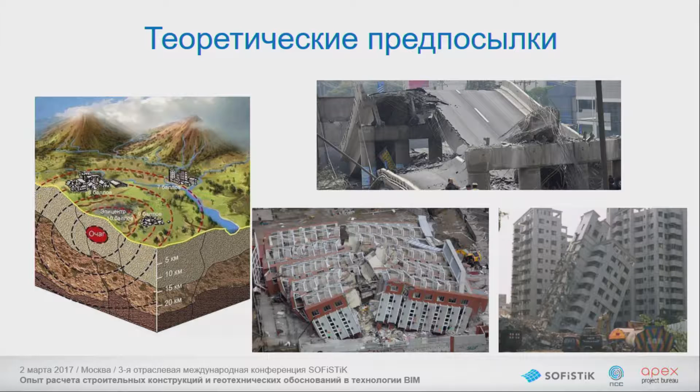It's a pity we have a lot of human losses and material losses, which means we have to take into account seismic activities. In some regions of Russia and neighboring countries, such calculations are mandatory. I lived in Sochi, and seismic there is up to zone 9. Before showing how to do it in SOFiSTiK, let us recall what an earthquake is, how we take it into account, and what kind of seismic analysis is available for different buildings. Special attention must be paid to compliance with local Russian norms and how they are implemented in SOFiSTiK.

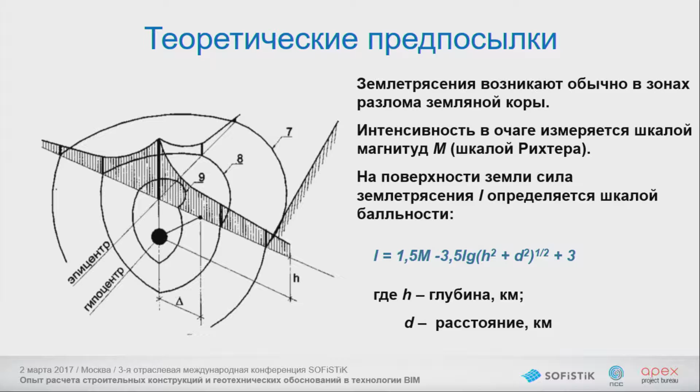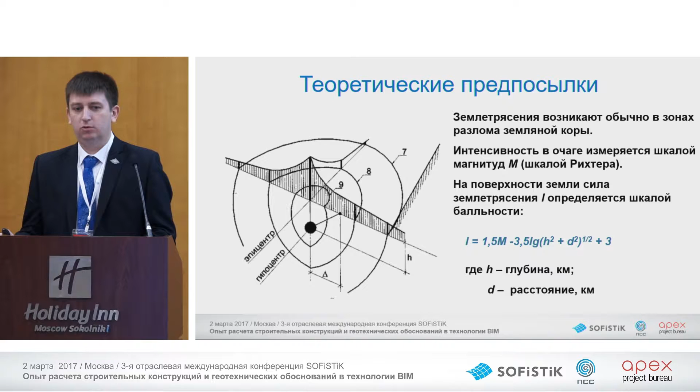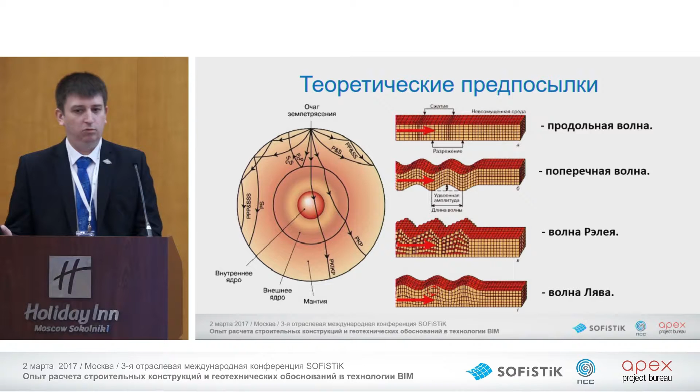As you can see, there are deep underground waves, longitudinal and transverse, which provide oscillations. When deep waves reflect from the Earth's surface, we have reflected waves as well.

In Russia, we use the 12-point seismic scale. We also take into account the accelerations on the ground, and the limit is zone 9. Above 9, no structure will sustain it; any structure will collapse.

Of course, there are some requirements for seismic calculations. We have to use two situations: the seismic loads for the projected earthquake and the maximum possible earthquake. Such calculations should be carried out with the help of instrumental or synthetic oscillograms.

For buildings with a simple design, we can use calculations based on a cantilever dynamic model. For buildings with a complex design, we have to take into account special calculation dynamic models of the buildings.

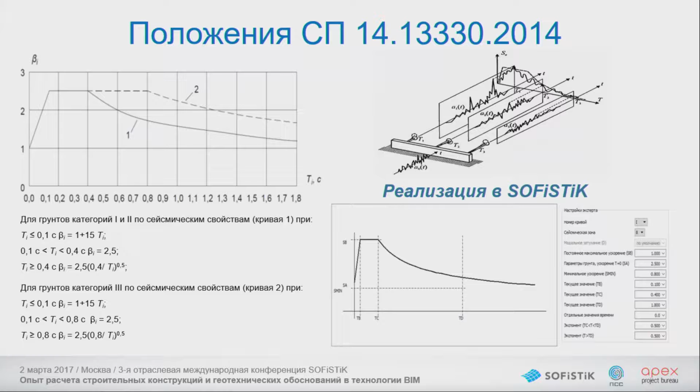This is normalized and compared with the regulators' norms. For example, the response spectrum shown in our Russian documents is on the left, and below it on your right is the same chart in SOFiSTiK.

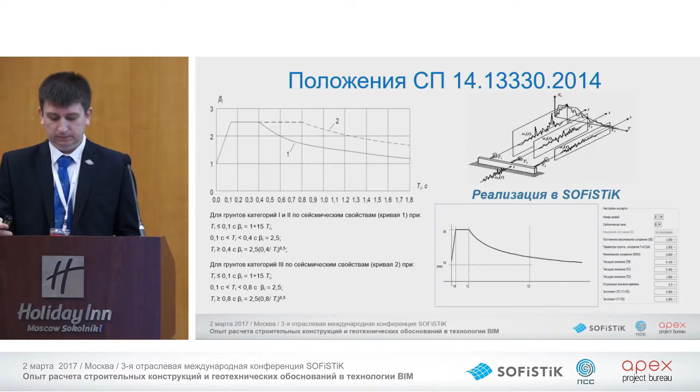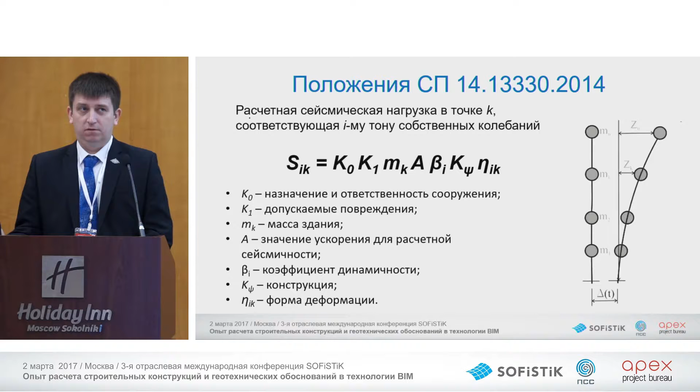The seismic load in the Russian norms is defined according to a formula with indices for the purpose of the building, acceptable damage, mass, acceleration, and other parameters. SOFiSTiK uses almost the same formula. I'll show it to you.

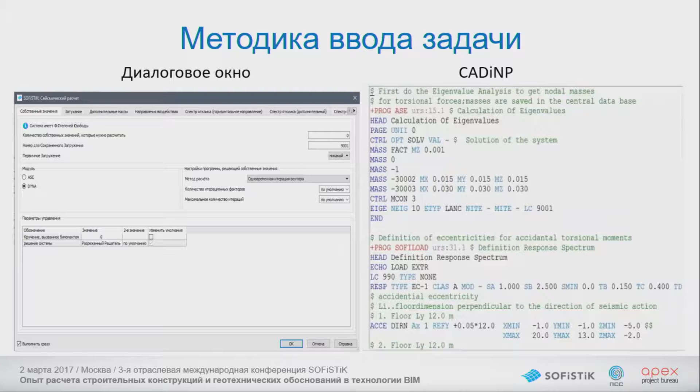To begin with, I would like to show you the implementation of the linear spectral method in SOFiSTiK. We have a separate dialogue for that, called seismic calculation in Russian. As with everything in SOFiSTiK, we can do it in CADINP language or through the dialog interface. You are free to choose either. In CADINP, you have more options to manipulate initial data and get appropriate results. The dialog window is simpler and more user-friendly, but more limited, as usual.

The dialog task is added from the SSD window. We open the list of tasks, choose seismic or earthquake if it's the English language interface, and see what it contains. It consists of several tabs describing certain steps.

Data entry to calculate frequencies of oscillations, damping, additional masses, vectors, ranges, and results.

Let us have a look at each of the tabs. First is the number of forms of oscillations, the number of entries, and the method of calculation - the calculation type ASE or DYNA. ASE is simpler; if you need extended data, use DYNA, along with the parameters for the calculator.

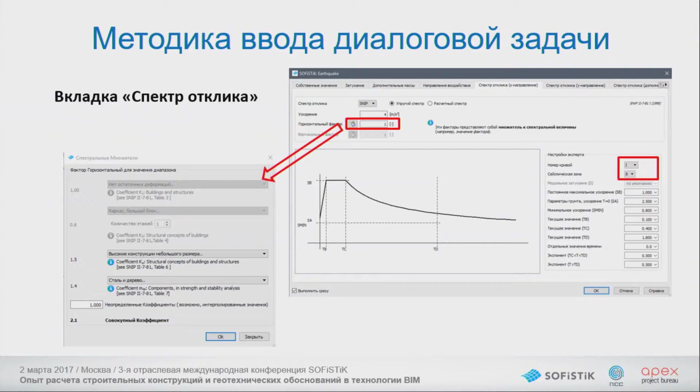If we take into account horizontal range only, that's one thing. If you have 3 axes, then you must have initial data for each of the 3, and then we choose the norm, including the Russian norms—they are available.

Separately, we have a tab for vertical and horizontal factors, additional indices with formulas. Everything is available. And in extended parameters, on your right, below, you can indicate periods of oscillations and other things, which, if necessary, and the results, the type of different oscillation types.

Then we have specific figures demonstrating reaction of your elements. This is the simplest dialogue available.

What do we do in the direct dynamic task? That is a benefit of SOFiSTiK, its advantage in comparison to other tools. Dynamic task means that you can describe a specific function of external influence—for example, accelerogram, seismogram, or any other dependency. And then you can see how your building is going to be deformed under this influence.

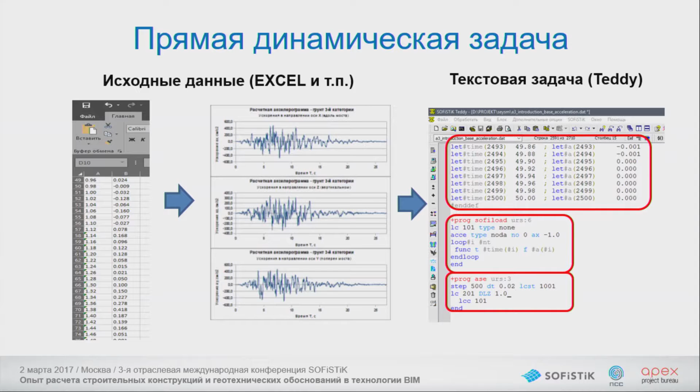As an example, we have this kind of initial data in a table, an accelerogram, an accelerations chart. It is programmed in Teddy, in CADINP language. Then we transform it into loads in the SOFILOAD module, and then step by step we calculate the deforming of the object. It's a detailed analysis based on a specific chart of accelerations.

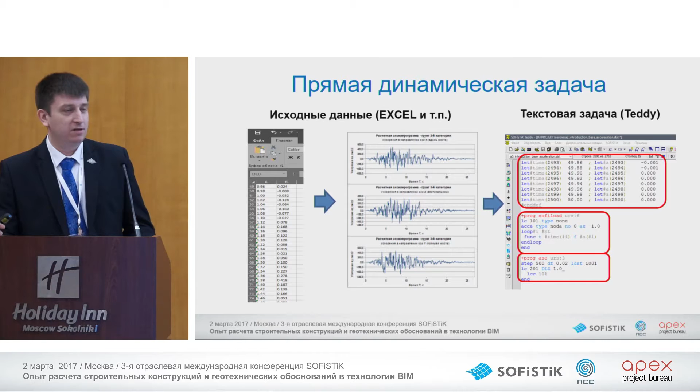When we analyzed this module, learned it, we talked to designers who calculated seismic factors in SOFiSTiK and found several problems, which I believe we have to discuss—the more so that SOFiSTiK experts are present here, and that will accelerate elimination of the problems.

The first problem is like this: in the last version of SOFiSTiK 2016, calculation is based on SNIP and not SP. Although they are similar, there are some differences. One difference is in the formula of calculations—the indices are a bit different.

There is a solution, though. If in your tab of response, for instance, you enter your parameters, you can do it yourself, manually—calculate the parameters, not just pick them up from the list, but enter them manually. This is one way out. Or in CADINP, you can program all that.

One more problem: according to the current norms for complex design buildings, you have to take into account the most dangerous direction for the buildings or its elements—they will not necessarily coincide with X, Y, or Z axes.

And what is the solution then? The simplest one is to use CADINP again. We take a chart and transform it with help of one instruction into text. In SSD, we press a button, transform to text, and then we can edit the text and enter appropriate parameters—enter an angle, for instance. This is the simplest way to avoid the problem.

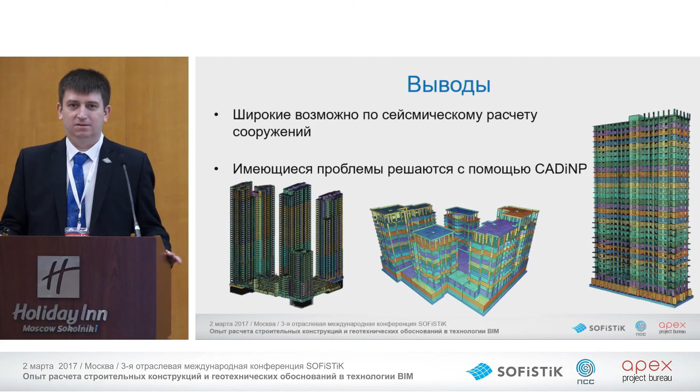Thank you, Alexander.

So far, with the Russian norms, I have a proposal. Now we're going to have the most interesting part of the conference. Let us ask one last question and then ask the questions to all the panelists. Yes, please.

Please tell me, did I get you right, that SOFiSTiK doesn't take into account the reflected oscillations? Reflected oscillations—so we have such a notion.

You don't have all the oscillations, the modal masses, so to say. Yes, you can enter the number of oscillation forms at the very beginning. So there is a special task in the dynamic model where you can select the right number—100, 200, yes, the limit is about 90 to 95. But first, define the number of forms of oscillations and then use all the variety.